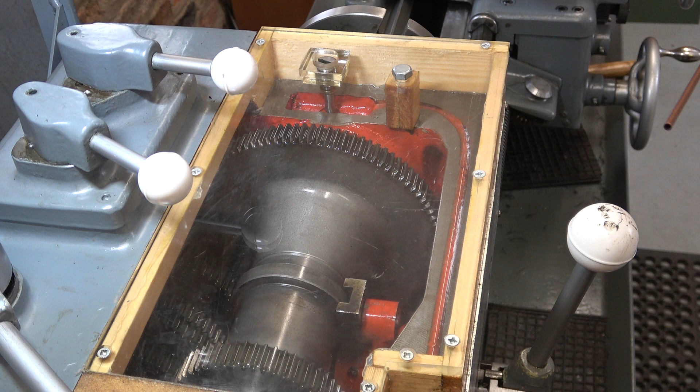This is looking down into my gearbox and the only feed to the spindle bearings is this splash channel here. And it runs down there, and then there's a magnetic plug and it runs past that and down into the spindle bearing. But it relies entirely on oil being splashed from the gearbox onto this ledge and into this splash channel. I'll set it going and show you the problem.

I'm going to start at 34 RPM and build up from there. And I can tell you that no oil is going to get onto this ledge until we get somewhere around 200 RPM. That's 120. Well, we just started to get a little bit of splash at 130 RPM. Let's take it up a bit more.

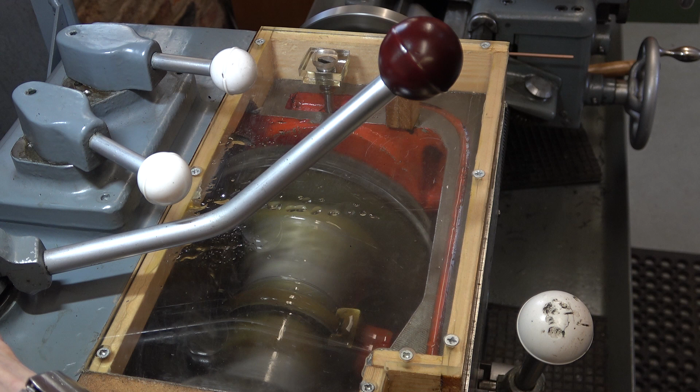Well, we got to 150 and still nothing going on the ledge. It's just getting onto that ledge at 250 RPM. Now, a number of people suggested that if I use thinner oil, I might not have that problem.

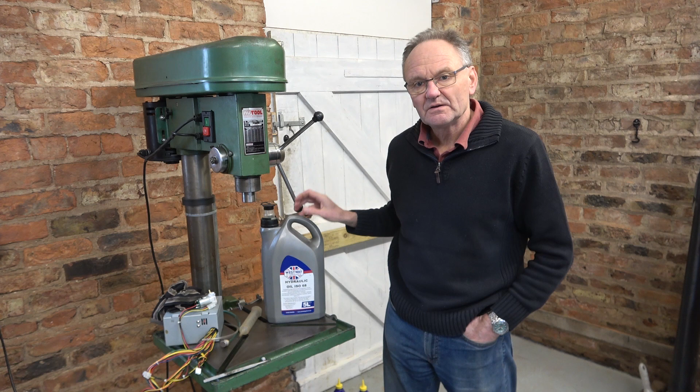The oil that's in the gearbox now is ISO 68 hydraulic oil, which is the equivalent of the old Shell Tellus 33, which is what the lathe had when it was made in about 1970, something like that. It's quite thick, and when the weather's cold, it's really quite thick and gloopy.

Now, a number of people have suggested that I'd be better with ATF, and I did think about that for quite a long time. I've kind of come to the idea that ATF is meant for automatic transmission, and also some versions of ATF are not yellow metal friendly. Now, there's a lot of bronze in my gearbox. There are not many ball races, ball bearings, taper bearings on the shafts. Quite a lot of it is hardened shafts with bronze bushing. So I was quite concerned if I used an oil which wasn't yellow metal friendly.

And I was watching Double Boost, John, his channel. He's got a Harrison 140 and he was using Royal Purple oil. So I did some research on that and I found that there were two versions of that oil that might work in this case. One is called Synchromax and the other one's called Gearmax. Now, Synchromax is intended for manual gearboxes as I understand it, and they're both yellow metal friendly. I went for the Gearmax version,

75W90. If I put the thinner oil in the lathe gearbox and it lubricates at low RPM, then happy days, nothing else to do, job done. But I'm suspicious that won't be the answer. So I bought myself this little gear pump from eBay, which we'll take a look at in a minute, which I'm powering from an old PC power supply.

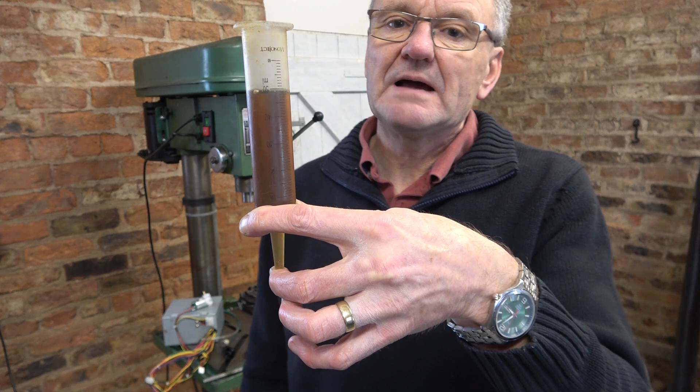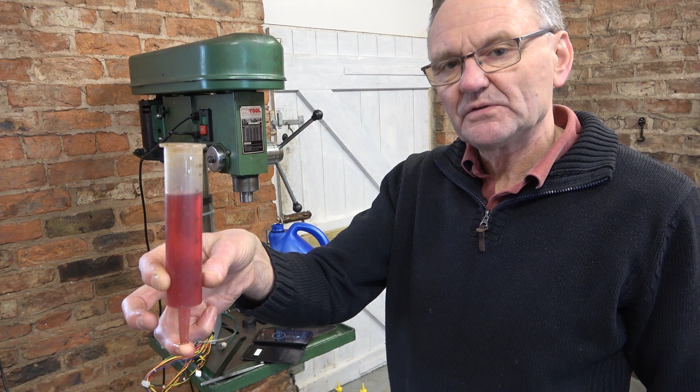Go. So I'm timing this on the stopwatch on my phone. I'm afraid this isn't very exciting for you, but it'll get better. 25 seconds for that. So now I'm going to try the ATF. So this is ATF 2364, which goes in my son's BMW ZF gearbox. About 18.5 seconds for that one, versus 25 for the hydraulic.

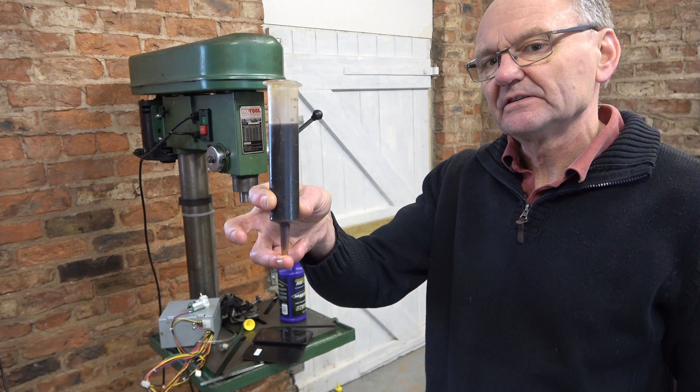Now let's try the Royal Purple. So here's the Royal Purple. Guess what colour it is? It's 9 degrees centigrade in here, 48 Fahrenheit. Okay, let's test this one there. 1, 2, 3, go.

Well, this isn't going to solve the lubrication problem, I don't think. It's just made a big hole in my pocket, that's all. Because it's about 25 quid a bottle for 1 US quart. About 51 seconds, whereas the ISO 68 was 25 seconds, I think.

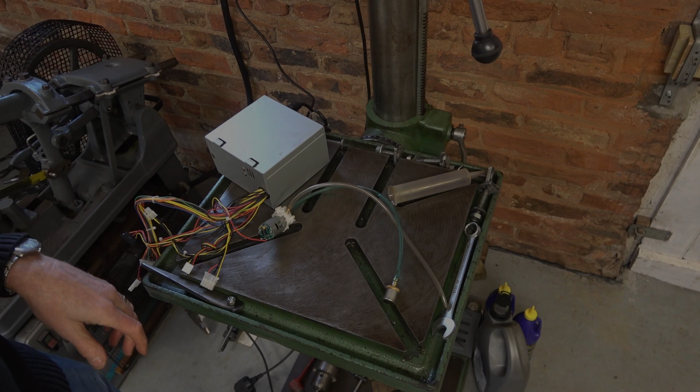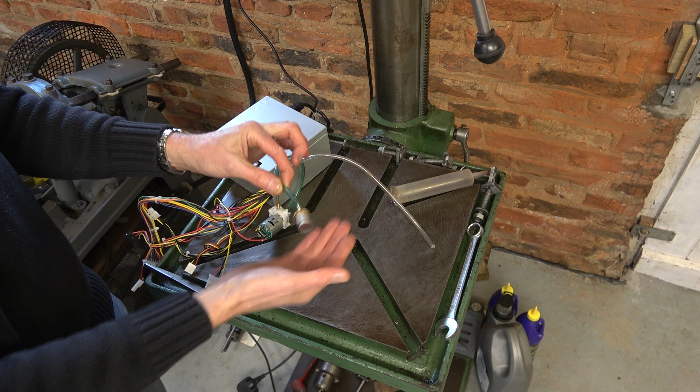So here's the pump and 2 pipes. I bought this strainer. I think it was about £10. It's not very expensive actually, but it's stainless steel with a brass fitting. And the idea is that that would just lay in the bottom of the gearbox and strain the oil that was being drawn up. Obviously it gives some resistance to flow. We'll see how we get on.

It's my intention to set this lower down the lathe, and therefore you'd get a gravity feed through this down into the pump. The oil in this can is the ISO 68 hydraulic oil, so we'll see how we get on with that.

Watch what you're doing. I'm not going to demonstrate the other oils with the pump because I'm just getting oil everywhere, and you can see that it works. It strains a little bit, but having this power supply from a PC in the lathe could be really useful because it gives me 12 volts, 5 volts and 3.3 volts I think.

And my son suggested that I could install a radio with a large subwoofer, but I was thinking perhaps, you know, air horns or something like that.

So next we need to look at the gearbox itself and see where we might put the pipework. By having the pump external and easy to access means that if this pump isn't really powerful enough, I'll just look for another. I can upgrade it any time, once I've proved the principle.

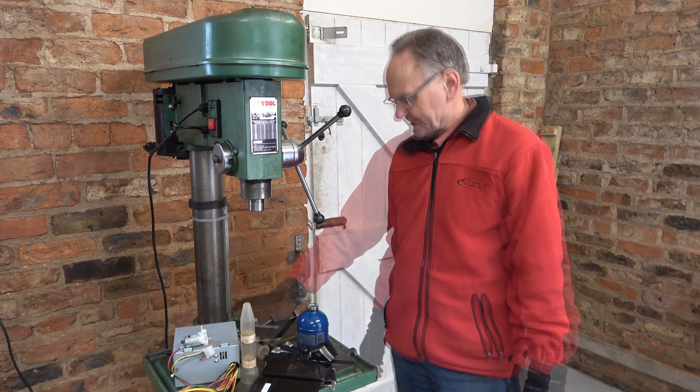We're a day further on, and I'm still trying to justify spending £50 on oil which was thicker. I have a plan. This test that we did, the viscosity test, this had a very thin nozzle on it, and I'm just thinking perhaps there was some boundary condition which made the oil a bit sticky. You can see I'm making this up to try and justify what I've done. But I've got this other which has a bigger hole in it, and we'll just try that.

So I'll put 50 millilitres in and we'll time it into here. Give me a second to set it up. Okay, original oil from the gearbox. Right, 6 seconds. And now the Royal Purple. About 11 seconds. So, yeah, about 2 to 1.

These, by the way, in the UK are about £25. When I looked at royalpurple.com online, buying from the States, it was $16, but I can't buy direct because they won't ship it. So somebody's doubling the price before it arrives here. It's often the case. You see something in the States $100 and over here it's £100, but it's not normally double. The ratio is about 1.37 to 1, I think, at the moment.

I'd convinced myself that the ISO 68 oil was thick, but looking at this table I can see that the 75W90 is 1.6 times more viscous at 40 degrees C. In fact, ATF is only about 30% thinner than ISO 68.

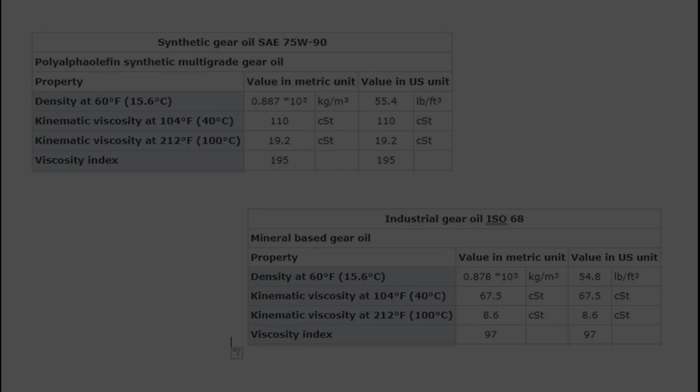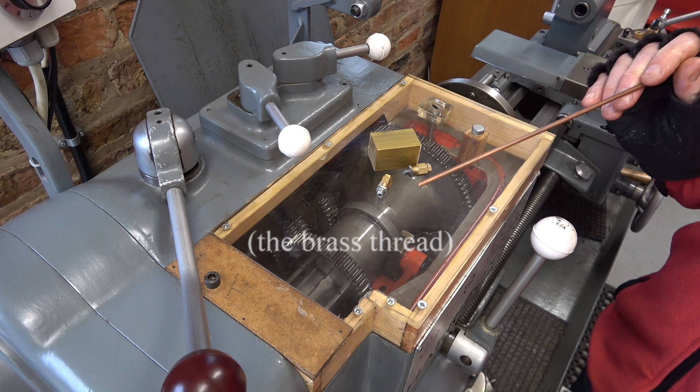For the oil feed, I'm thinking about making a manifold, so I've got a block of brass to do that. I've got these fittings, and the thread is 1/8 BSP, and they have an olive and they take a 4mm pipe.

And if I put this block within the lid, maybe this area somewhere, and then all I need to do is to run pipework that runs really just onto this ledge here, and then another pipe going to the left hand spindle bearing, and then another just going onto the clutch bearing. And if I can keep all of that within the lid itself, it minimises interference with the main body of the gearbox.

Now I'm going to have to think about the pickup, and the pickup is probably going to have to go towards the back. The oil in this gearbox is really quite shallow, maybe only about that, if you can see my fingers, there we are, only about that probably. And when the lathe is running in the forward direction, all the oil gets pushed to the back over here. But when the lathe is in the reverse direction, the opposite's not true. You just see the normal oil level at the front.

So to be sure that the pickup would always be in oil, it's going to have to go in this back corner somewhere, down at the bottom of the gearbox. So I've got to figure that out. And then the pump itself, I'll try and put as close as I can to this block, so we keep the pipework short, because obviously it's a lot easier to run electric cables up to this corner perhaps than it is to run copper pipes everywhere, which will restrict the flow, cause too much drag on the flow.

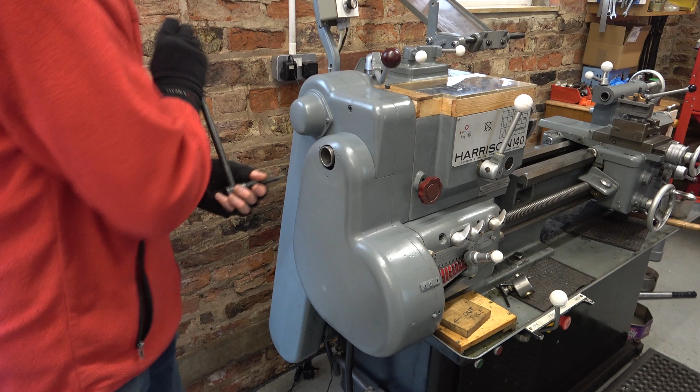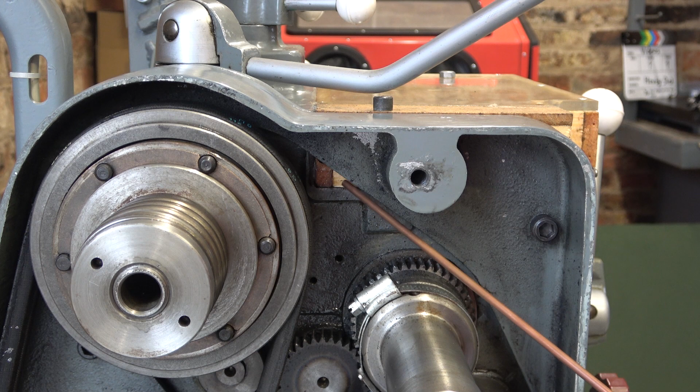This pulley I made is doing all right. Right, as I look from here, I can see some of this wood. So without cutting any metal away on this casing, I could possibly get a couple of pipes in there. You can see that wood there from the lid. I could cut more of this case away if necessary without damaging anything.

I'd then have a couple of short copper pipes coming out, coming into PVC tubing around here to the pump. When I wanted to take the lid off, I just pull the two tubes off and it would come away. There's about 1 inch of oil in the bottom of the gearbox. And when I check my strainer, that needs about 20 millimeters of oil to sit in. So if the strainer sits right at the bottom of the box, it might be okay. Or if I can lay the strainer on its side, I don't know yet.

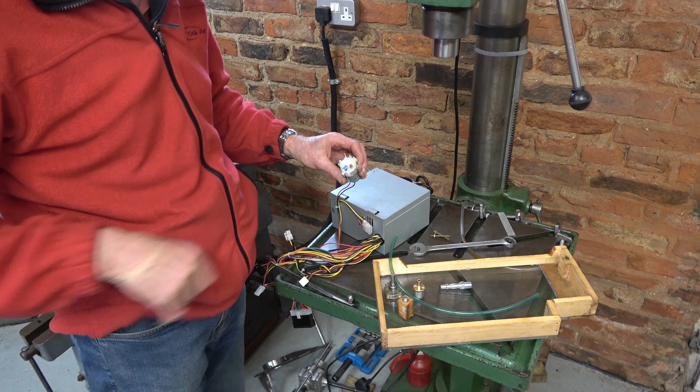This motor, these holes, they're nice brass fittings, but the hole in there is under 2 millimeters. And I think the pump's got more capacity than that. You probably saw that the flow was a bit strained, so I'm going to see if I can improve these. This is what I'm talking about.

If I unscrew these, the hole, if it will focus, is about 2 millimeters maybe, but that doesn't go all the way through. But if I turn it over, you can see that thread there. It's only about a 3 millimeter thread. So I'm looking at making some replacements for these.

But I want to get the cover off the gear pump and just see how much material I've got to play with. There's very little in here. Just this black driving gear, this white driven gear, a labyrinth of passages. And I just want to check the size of these passages. The galleries are about 2 millimeters wide. This is a 2 millimeter drill.

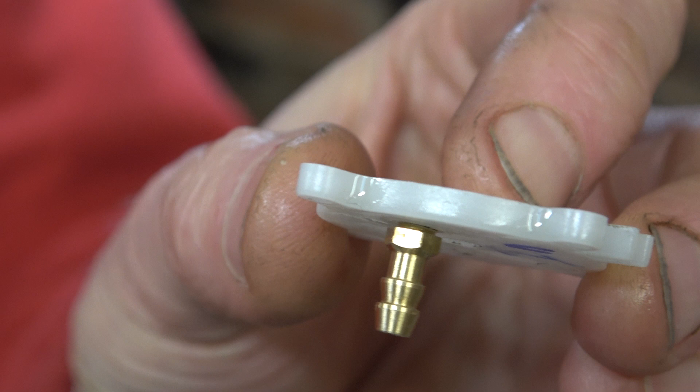The front plate on this pump is actually quite thick. There's quite a bit of material to play with there. And I've got some brass 2BA screws which I might be able to adapt. No chance. Oh.

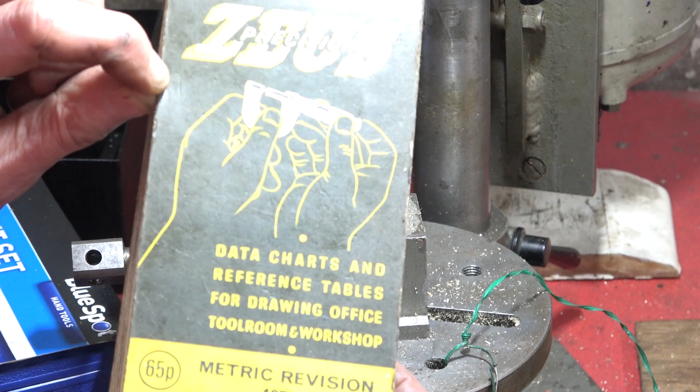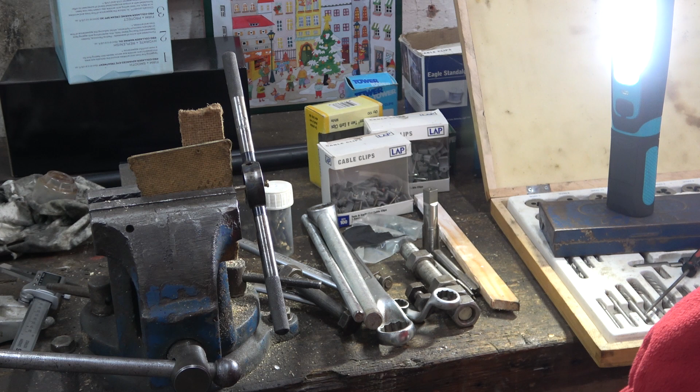Now to consult the Zeus tables and look for the tapping drill for 2BA, which is 4 millimeters. 1976 metric revision. I hope it still works. I decided that 2BA is taking up too much real estate, so I'm now threading it down to 4 millimeter by 0.7 mil pitch.

Good morning. This is where we got to yesterday, making these replacement pipe connection fittings, and I'm going to leave that for now because I'm going to take a look at the oil feed supply within the headstock for the spindle bearings and think that through and finalise the design.

The minimum that I need to do, in fact, is to run a pipe from here across here and deposit oil onto this ledge. It would run along this channel and feed this spindle bearing. But I'm going to take the opportunity to lubricate this bearing, the left-hand ball race for the spindle, and the ball race for the input shaft, which is just sitting this side of the clutch.

This brass block would be machined to make a manifold, and it would need to sit somewhere like this. It can't sit over this side because there's a screw hole here which bolts the lid down. This bearing is pretty much directly under the block, so perhaps just a little spout off this would be enough, and the oil would just trickle down on here and trickle down into the bearing.

If I put a fitting here, the pipe could come out and come this way, and ditto the other side to take a pipe back here. I could simply solder in a pipe coming from this hole out of this casing here. I only need fittings, really, olive fittings, where I think I might need to make some adjustment.

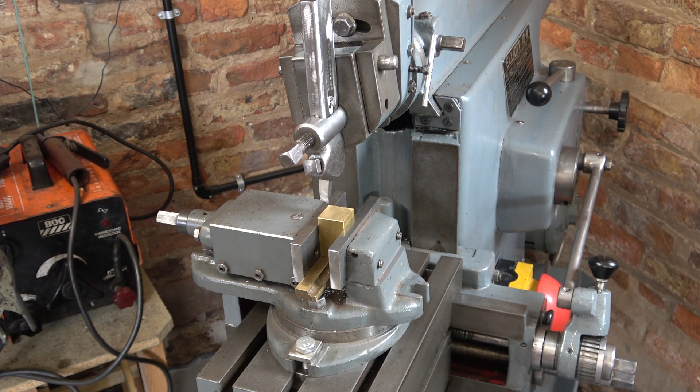Here's an idea developing. This fitting here, 1/8 BSP fitting, could go in just below where it is now, with a pipe coming across within the lid, and with a bend on here, just tucking it behind where this screw hole is. And then I'd put a similar fitting on the front face just to the left here, and then potentially one on the end to take the input pipe. Right, I think I'll have a go at that. I'm just going to square the ends of this block off in the shaper.

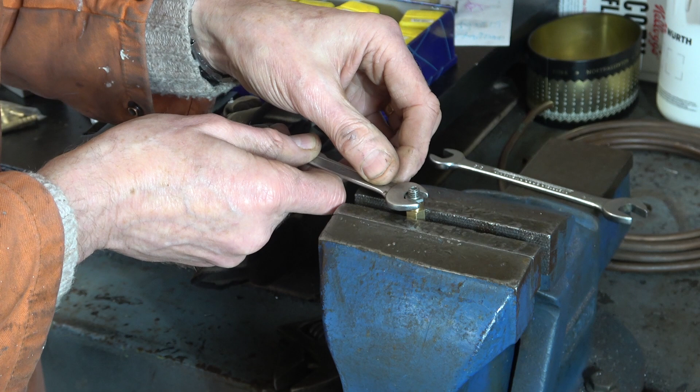That looks pretty good. These were thread adapters that I put in for a different job. I was converting from 1/8 BSP to 1/4 Whitworth 20. So let's see how tight they are, because I don't need them for this job, obviously. Oh, not bad. Wow, that's pretty good. They were Loctited and pressed in on the press.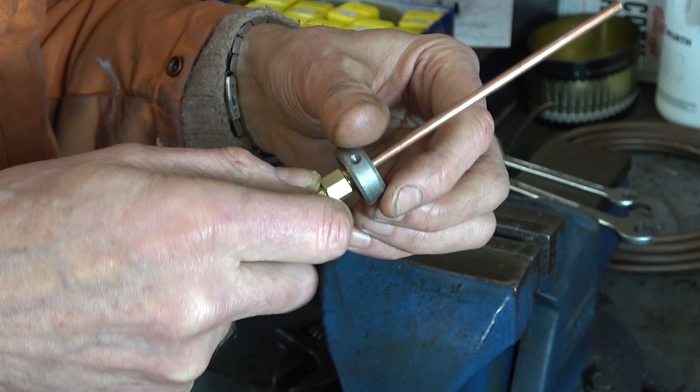Clean those up with a 1/8 BSP die, and I can make sure it's not cross-threaded. It's going okay. Yeah, that's fine. This is the layout I've decided on, and the feed will come in at one end like this. The tapping drill for 1/8 BSP, according to the Zeus tables, tells me 11/32 or 8.75 millimeters. So it'll be 11/32 because that's what I've got.

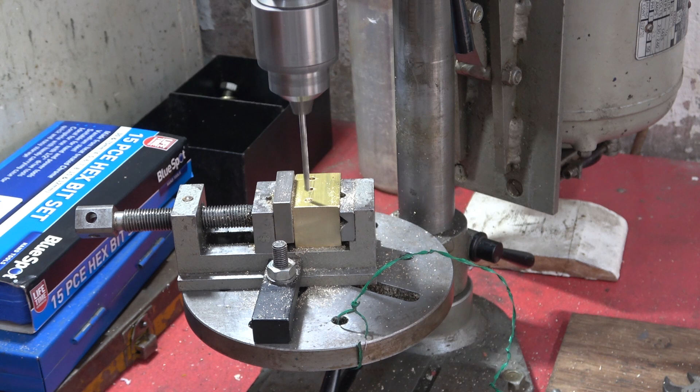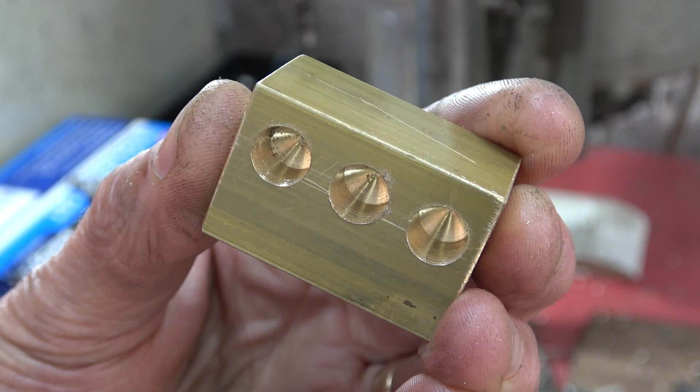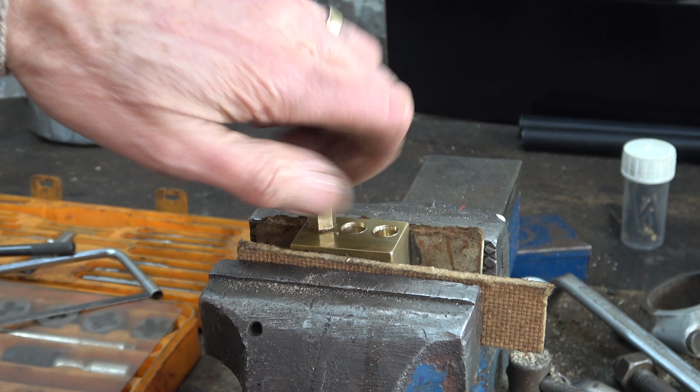Just doing the third pilot hole, I've set a drill depth. That's 3 tapping holes done. They look quite good. I'll start tapping each hole in the drill press just to keep everything vertical. That'll do, I think. Right, get the other 2 done now.

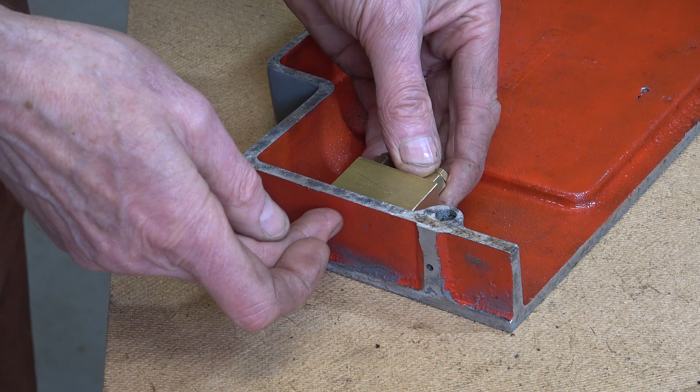So there's the manifold with the 3 fittings for the 3 pipes. I haven't cross-drilled it yet, for the chamber going across. I'll do that later when I know exactly what I'm doing. And this will fit about there. And I'll have a couple of screws to hold it. I've got some countersunk Allen screws, 15mm long, M4 by 0.7 pitch. So a couple of those will secure this.

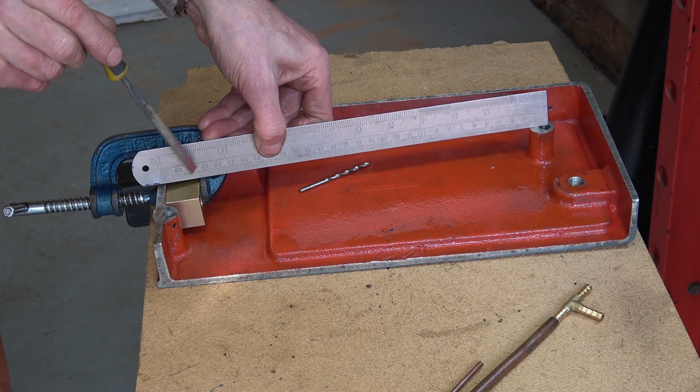Now, because of the angle on this casting, I'm just having to set this edge away from the bottom, but I just need to make sure that this other edge here isn't going to be touching. So I'll drill one, thread it, screw it up, position it, drill the other, thread it. So that's the first one tapped. I'll just drill through and mark it, and then I can work from that.

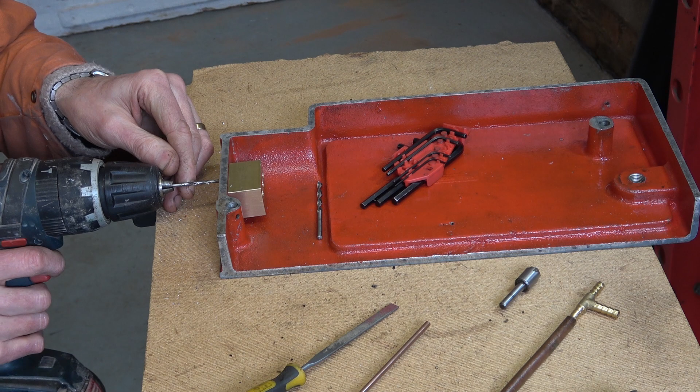Okay, that's fixed on. So the next thing is to figure out how the feed pipe's going to come from this side and into here, and what I'm going to use for that. These are each 4mm. I'd like to use something more like 6 internal if I can. To bring the oil feed into this manifold block, I've decided to use some of this 8mm copper pipe, and I'll need to put a bend in it to bring it round here and out of this side.

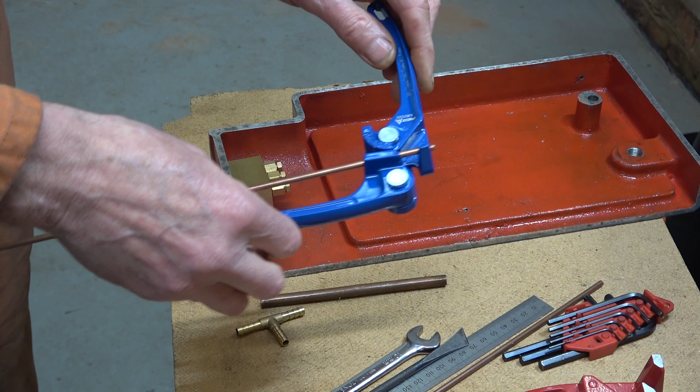And then I will solder a piece of this onto the end of it to give me a pipe barb. I'll have to machine down this little bit here to 6mm, and I'll cut it off by here, just giving me that length of barb, which I'll then solder into the end of this pipe. So to do this, I've had to buy a pipe bender for this size of pipe. And of course I'm going to have to bend the 4mm pipes, so I bought another smaller pipe bender to bend these pipes. Anyway, we'll put this one to one side and we'll get on with this.

There we are, and a bit of silicone round here will seal it. So now I need to drill a hole in here to take this pipe when it's bent. I've drawn this up and you can see it's going to be a bit tight. Pilot drill. Now an 8mm end mill. Now a 6mm end mill to create an offset pocket to start my 6mm drill.

Well, I got there in the end. I drilled into the first 2 fitting sockets with a 5.5mm drill, and then into the last fitting socket with 4mm. The problem was that as I was breaking through, it was pulling the drill offline. And if I'd been a bit smarter, I would have drilled this one first. It's going to be okay, I think. Let's have a look. Carry on.

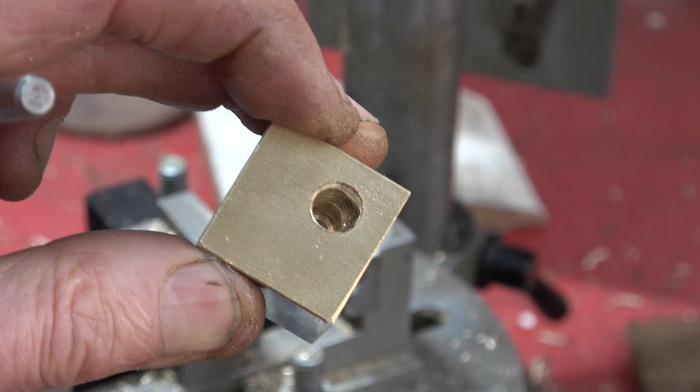Right, see if I can get this bend right now. I've got plenty of pipe, so I can have as many goes at it as I like, really. It needs to bend from about there, I think. And I guess R must be the middle one, but I don't know how that's going to work. Let's see. It's not making a lot of sense to me.

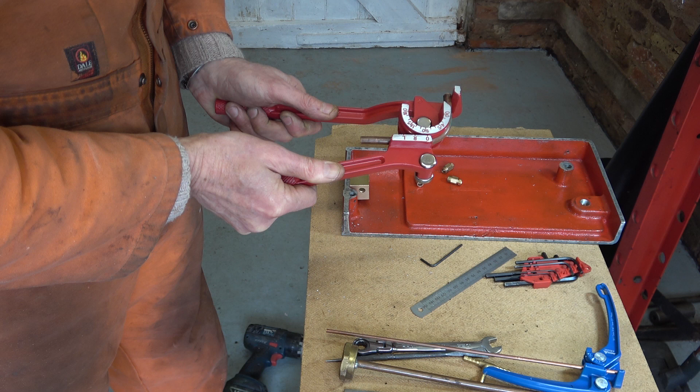Oh, that's 0 on that one. Ooh. So when 0's there, it seems to be 90 degrees. Well, that's quite close. Problem is the bend's really not quite tight enough, but I'll work around that and get it to fit. I found this pulley which might give me something a little bit tighter to bend around.

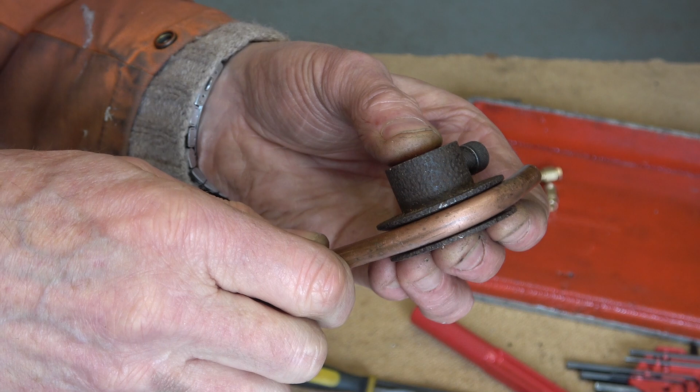Okay, that pipe's in place, not soldered. All I need is this barb to stick out of here, so I can pretty much cut this pipe off flush, and that'll make it a bit easier. How I'm going to get this lined up to solder, I don't know. I'll have to think about that. I don't think I can do it on here. I'm a bit worried about melting it.

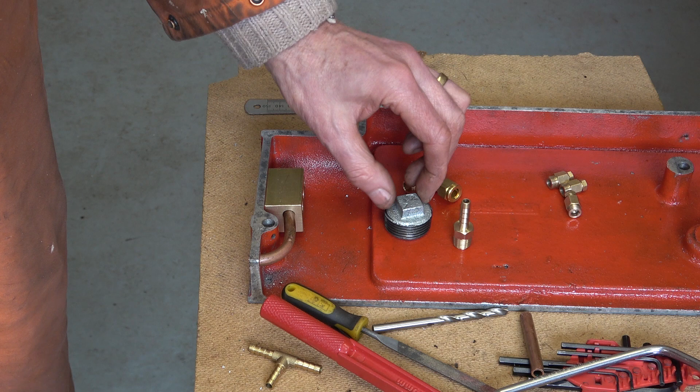Some bits have just arrived for this project. A 1-inch BSP plug, a 1/4 BSP hose tail, and a 1/4 BSP by 8mm fitting with an olive. And either using this one or this one, I'll make the feed from the gearbox to the pump.

Anyway, back to this. So I'm going to cut this here, and I'm going to use this hose tail here. I'm going to solder this end into my copper pipe here, but I need to machine this down to 6mm, and I'm going to do it on my other lathe. This is my other lathe.

It's a Super Adept, and they were made as home hobby lathes, I think, between 1933 and 1961 by a company in Sheffield, England. And this was given to me by my wife's grandfather in about 1979, I would guess. And I barely ever use it, but for the first couple of years I was making lace bobbins.

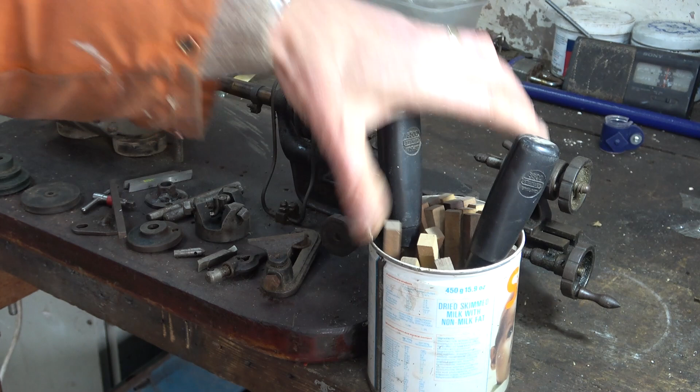So here's a couple of my lace bobbins, if that will focus. There we go. And I used to glue various woods together and use this as a wood turning lathe. Bobbins were quite expensive at the time, so we used to buy blanks and I'd machine them up. So I've got a load of blanks here, and I use these chisels for wood turning, and these blanks are all different woods. Anyway, today I'm going to use it to machine a fraction off that brass barb.

There's various, well, this is a 4-jaw chuck, you can see that. There's a steady rest there. There's a 3-jaw chuck. There's a tool rest that I made some time ago. A couple of different spindles. There's a centre there. It would have been driven by a belt on this pulley at one time, but I connected this bit of hose here onto the end of the spindle shaft and mounted this motor up.

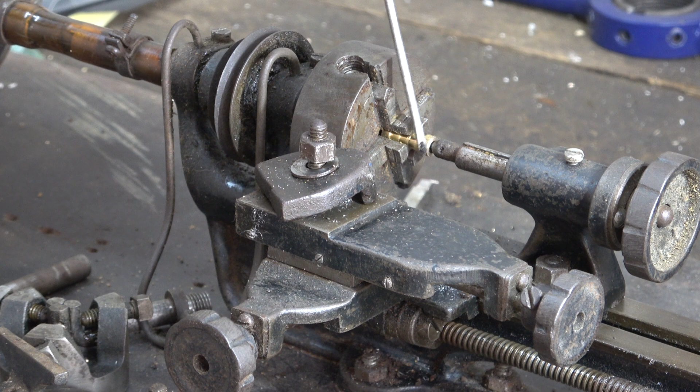So that's about a 1953 GEC 1/6 horsepower motor on a couple of rubber blocks, and I made these rings to hold it down, which I think are from the differential main output shafts from a Mini. Trying to get the work centered in the 4-jaw is a bit tricky, but I think I'm there. Oh, very naughty. I left the chuck key in. Whew.

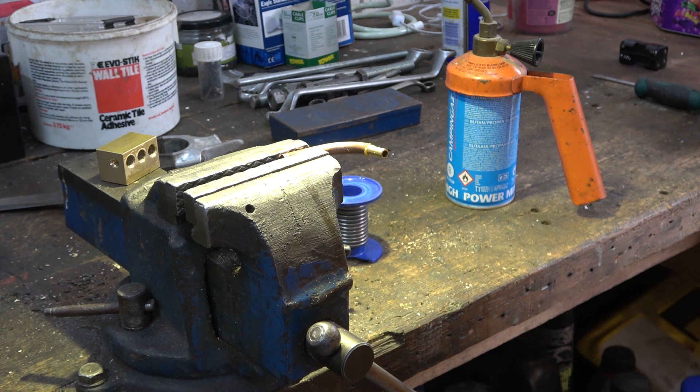There we are. So the next job is soldering. Now I've checked. The melting point of the solder is about 250. The melting point of the aluminium is about 650. But I don't trust myself, and I could get point heat on something. If I melt this case, it's curtains. I don't think I'd ever get another one. So I'm going to have to solder this on the bench. We'll do this hose tail first. I don't solder every day, so it will get me back into practice before I do the other end.

To try and get this lined up right, I've put a scribe mark on the pipe, but I've also put a little dot on this block, and if I line up the scribe marks and the dot, I should get it at the right angle. Place your bets. Well, the chances of getting this right on the first attempt are not very high. I'll solder it up and we'll see where we get to.

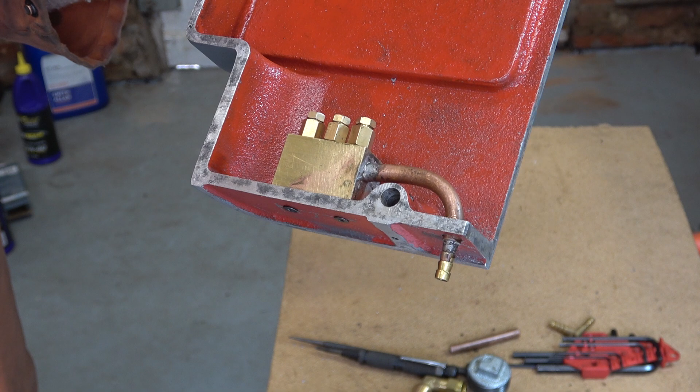Well, there we are. First go, actually. But there we are. So let's just try it on the gearbox. See if that pokes out in the right place. Well, it's going to need a slight relief by the look of it. I'll just use a round file and just take a fraction off that corner there. But otherwise that looks alright.

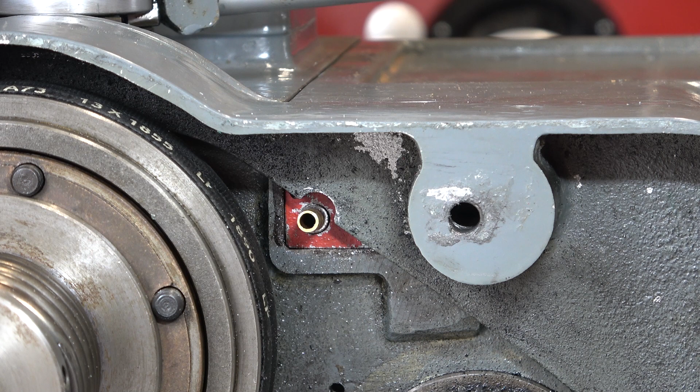Yeah. I filed that casing away to give it plenty of clearance so it'll take the diameter of the tube as well. Now I can move on to the oil pickup from the gearbox. Here's where the 1-inch BSP drain plug goes, and I'm going to arrange a feed from that in 8mm copper pipe.

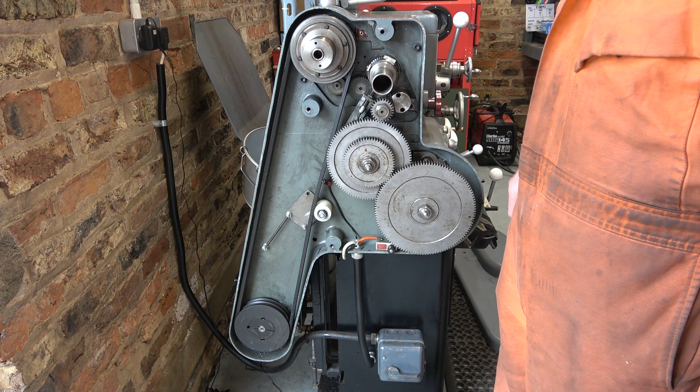The plan now is to run an 8mm copper pipe from the drain plug down the back of this panel and coming out somewhere here, and for the pump to be in this area now, and then a pipe to run from this fitting, just PVC clear pipe from this fitting down here and down to the pump, and that'll give me my circuit.

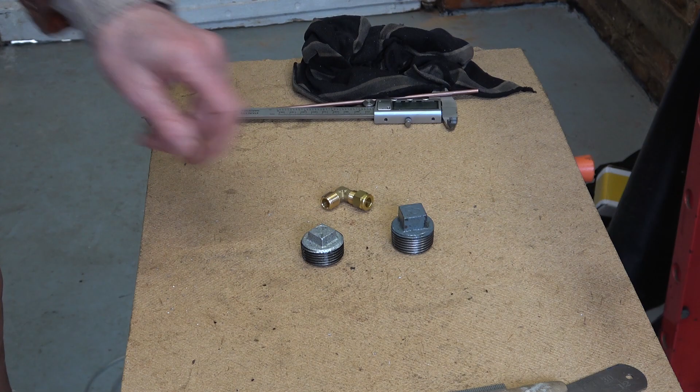So this is the old plug, but I bought this new plug just in case I mess up. I don't want to be left without a plug for the lathe. So I can always put this one back in any time I want. And this is the fitting which will fit in there. So I need to drill and tap that out now. We'll start with a 3mm pilot drill, and then the tapping drill is 11.8mm, which I don't have. But I do have a 15/32, which is 11.9, so that's what I'll use.

Now I've got a taper tap and a parallel tap. I'm going to use the parallel tap because I think that will give me more freedom in terms of setting the angle that I want to take my 8mm pipe in the right direction. I'll start it off in here for as long as it will go, which isn't very long, look. But that'll do. It's going quite smoothly, that. I could have used the tapping head if I could have been bothered to set it up, but it didn't seem worth it for one hole. Okay, that went well enough.

Perfect. The next question on my mind is, can I incorporate this strainer somehow? It certainly goes in, works well enough. I could solder this into this somehow. I have a plan, actually. Maybe. It means the two wouldn't come apart, they would be forever in here, but that doesn't matter.

Just setting up, nothing soldered yet, but you can see that this is bent downwards, and this is set at 90 degrees to this. And so this should just bend down to the bottom of the box. Okay, I'm just about ready to solder this end. If you can see, as I rotate it, look, this is orbiting up and down. What I found was that there's a gear in the lathe headstock about there, so I couldn't have this pipe as bent as I wanted. But I've done it now, so that's how it'll be. And it's set so that when this is at the lowest point, this is pointing off to the right, because that's where I'll need it. And it just gets me a few millimetres of extra oil depth above this.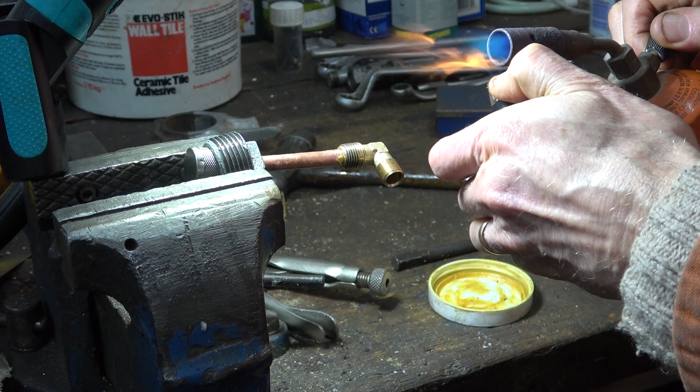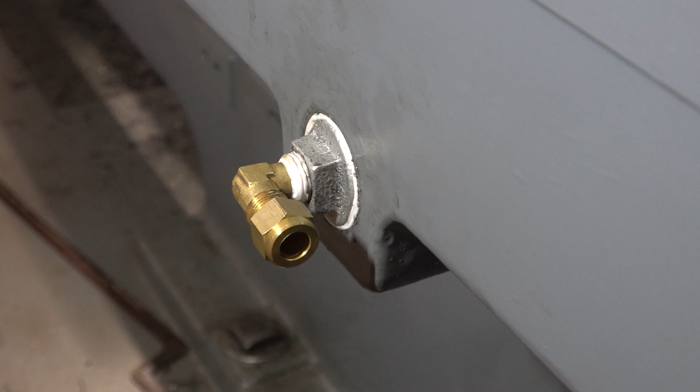Done. That's fitted in place, nice and tight, plenty of PTFE tape. And right down in the bottom of the gearbox there is the strainer, just above the bottom, peeking out between those two gears.

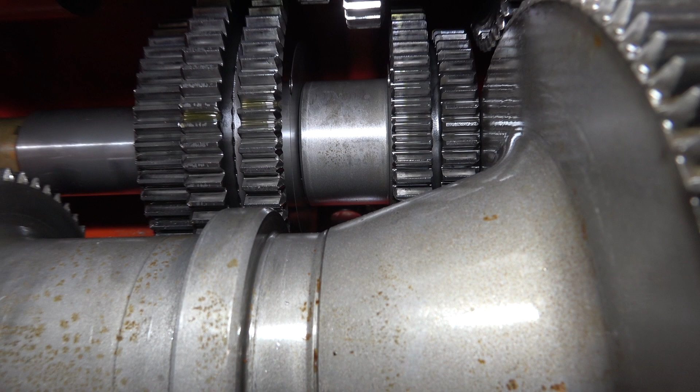Good morning. I've drilled myself an 8mm entry hole into the case where the pipe will come in, and I'm starting to straighten the pipe, which is on a roll. Doesn't have to be perfect, but straightish would be nice. There we are.

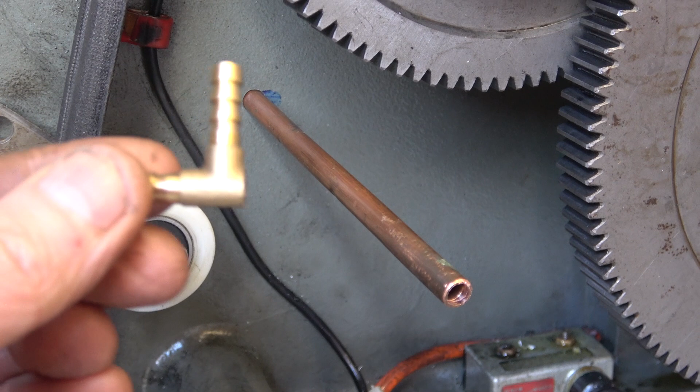Right, second bend. I don't know about you, I often end up bending my pipes the wrong way, going this way instead of this way. Anyway, this one is right, and I've lined it up this way so it doesn't go like that or like that. See where we get to with this. That lays about flat, so it's not far out. Maybe slightly twist, not much. In fact, how about that? That's near enough for Haxby Shed. So I just need to cut that short now and then machine this down on my other lathe and solder it on.

Put a bit of flux on it.

Right, that's all connected. So the next thing to do is to transfer the brass manifold from the aluminum lid to the transparent lid, so I can see what I'm doing to set the internal pipes up within the lid. Bit of fiddling around, but got there in the end, and I'm satisfied that this block is in exactly the same place as it was on the other aluminium lid.

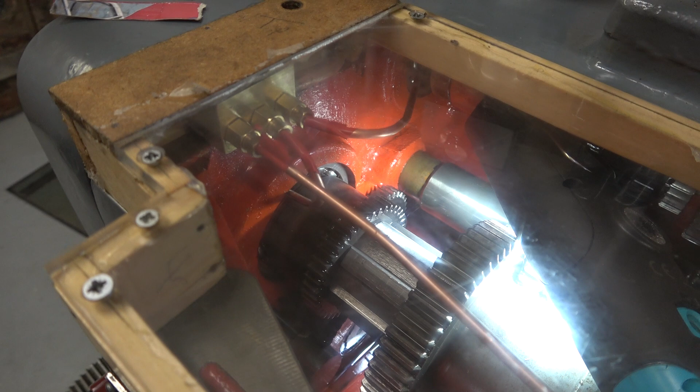So now I can fix up these feed pipes to the spindle bearing and the other bearings. It's been a fair bit of work, but I've managed to get the pipes in the right place. One's gone into that bearing at the back there. One pipe is just coming down onto the left-hand ball race on the spindle, and this pipe is going across the front here and nicely dropping into that

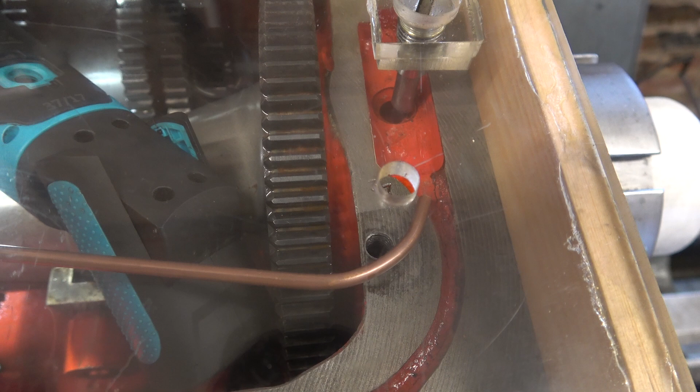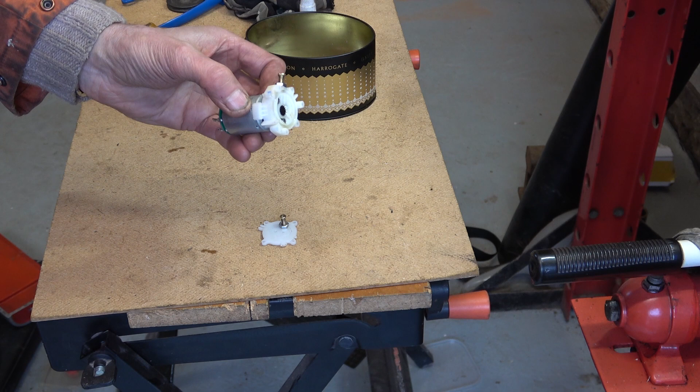runway. And because I believe that manifold block on that transparent lid is in exactly the same place as it will be on the original aluminium lid, if I set all the pipes here and transfer the block across, they should all go to the same places. They're fitted now with a bit of Loctite on, so I'll just put this back together.

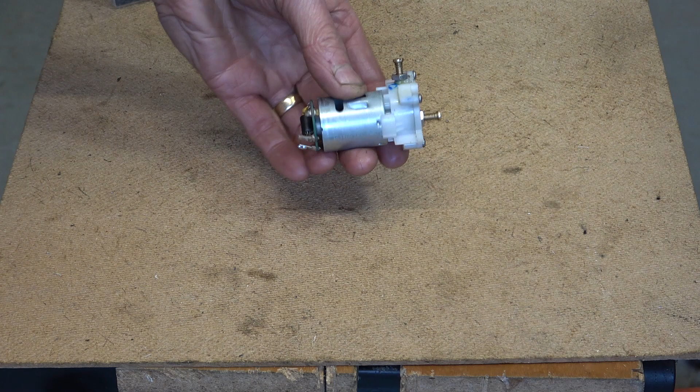When I bought this on eBay, it said it was good for water and oil, and look what's happened to the O-ring. Luckily, I've got some others that will fit. All back together, so we'll pick up on this tomorrow now and hopefully get it working. We're getting very close now.

I've put this big grommet around the pump, and I've used a bit of bronze welding rod so I could put a screw through there just to hold it for a test if I need to. I've connected up the feed from the gearbox and put this clamp on. So now it's time to put the oil into the gearbox.

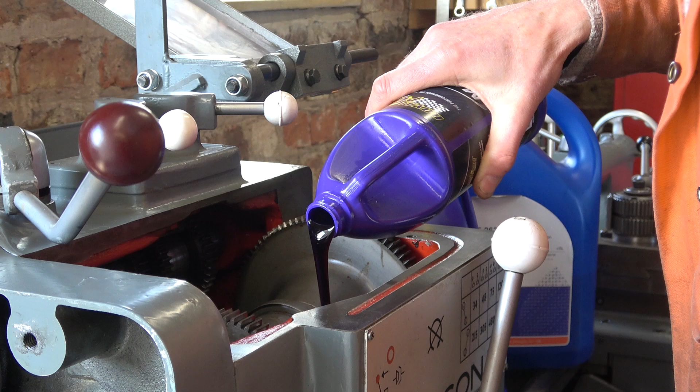Number 2. Get every last drop out of that. It's a fraction above the line. Here comes the oil. Okay, now we're going to find out if the whole thing was worth it at all.

So you can see this tube here is full of the purple oil, which is now priming the pump. I think I've got the pump connected the right way around now, because it was the wrong way. And we should watch for the oil being pumped up here, behind these gears, round here, and into the cover. So, 3, 2, 1, go! Da, da, da.

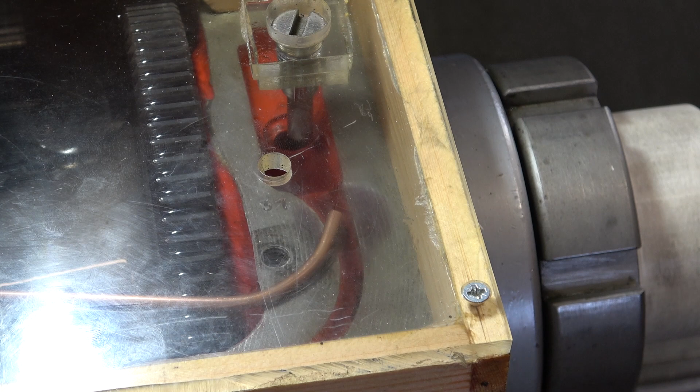Well, it's a bit noisy, it's struggling, isn't it? But it works. I don't think I can stand the noise for very long. Let's have a look in the head. The oil is coming out. Oh yeah, I can see the oil running down. The pump will probably burn itself out shortly.

I think it's time to take stock. Overall, I think this has gone much better than I expected. It's certainly entirely feasible. The oil pump is too small. Also, it's not continuously rated. But it was only about £6 and it's proved the whole principle of the thing. So, you know, it did its job.

The pipework within the lid went better than I expected. It's probably overkill to set up feeds to all those 3 bearings. And if you don't have a transparent lid, which maybe you don't, then it's easy to set up a pipe from this corner to the spindle bearing at the front here without the need to see within the lid to set it up. It's obvious where it needs to go.

The oil is too thick. I made a bit of a schoolboy error with that, but there is some good news. My son needs to put new oil in his car gearbox, and he probably won't pay me much money for it. I might not save money, but I will save face.

We'll leave the oil in here for a while, keep an eye on it. Let's just see when I manage to get the new gear pump. If it isn't soon, I may well drain this out and go back to the ISO 68 oil. So overall, I think it's worked very well.